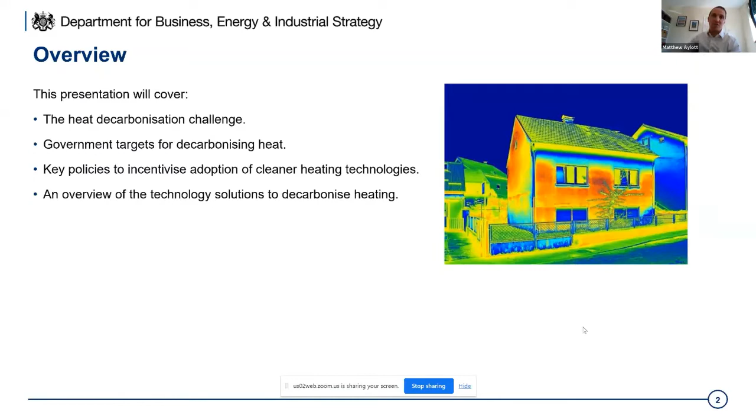In this presentation, I'm going to cover a little bit about the heat decarbonisation challenge as we see it. I'll talk you through some of the government's targets for decarbonising heat, the key policies we're adopting to incentivise cleaner heat technologies, and an overview of the technology solutions to decarbonise heating, including some of the novel and innovative technologies emerging on the market.

Most of this I'm sure will be very familiar to most of you on the call, but heating is responsible for nearly a third of our greenhouse gas emissions, and we've got a commitment to decarbonise the whole economy. Meeting our net zero targets will require virtually all heat in buildings to be decarbonised by 2050, but urgent action is needed now to keep us on track to meet that objective.

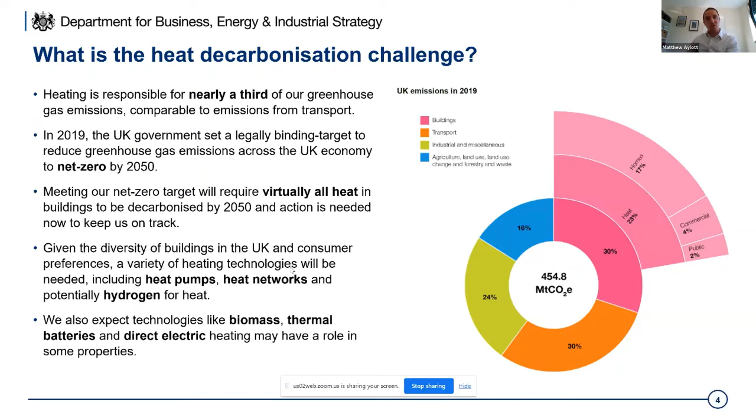Given the diversity of buildings in the UK and consumer preferences, we think a variety of different heating technologies will be needed. That will include heat pumps, heat networks, and potentially hydrogen for heating, but we also expect there to be a role for other technologies like biomass, thermal batteries, and even direct electric heating technologies in specific situations.

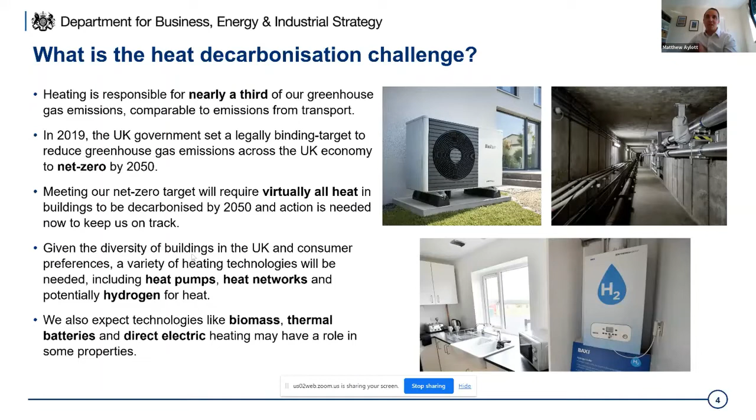Just to flag, these are some of the technologies which might be suitable. We've got a heat pump in the top left-hand corner, a heat network in the top right-hand corner, and a hydrogen boiler made by Baxi that we've been funding and supporting in the bottom. There's also alternative electric heating technologies like some of the ones we'll be talking about today, including storage heaters, thermal batteries, dry core storage boilers, infrared heating panels, and perhaps last but not least, biomass boilers in the bottom left-hand corner.

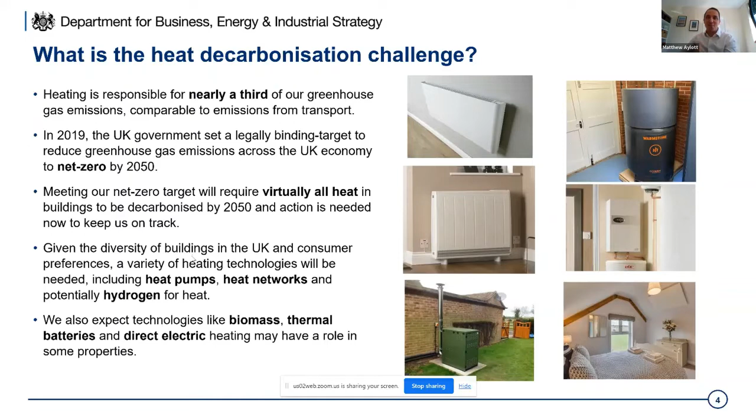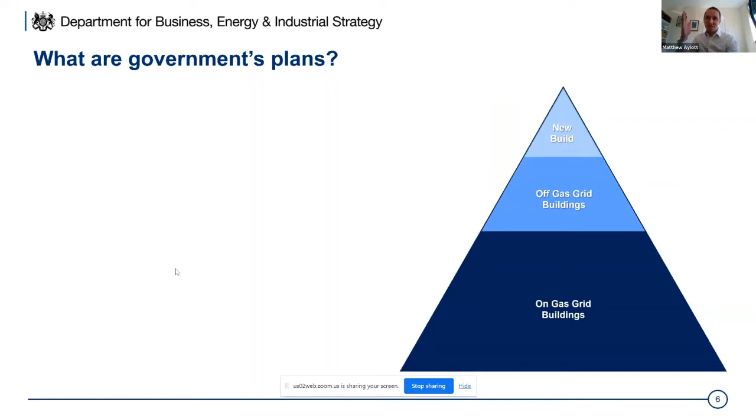So what are the government targets for decarbonising heat? This pyramid on the right-hand side shows you the kind of hierarchy of priorities. At the top of that pyramid is new build. Government expects to build 300,000 new homes each year from 2025.

We want to ensure that those homes are future-proofed, so we've introduced regulations that will improve the performance of new buildings. We've introduced the Future Home Standard, which will come into effect in 2025, but we also have an interim uplift, which gradually increases the pressure on housing developers to deploy more low carbon heating technologies and improve the thermal efficiency of the building stock.

So we think those new build homes are going to be particularly well suited to some of these low carbon heating technologies like heat pumps and alternative electric heating technologies.

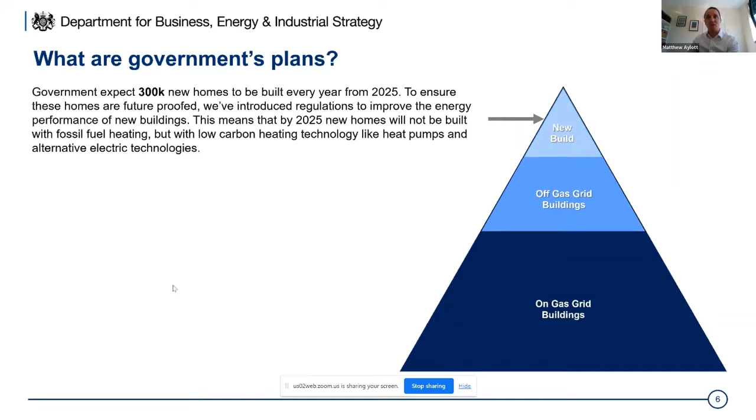There's also the 5 million homes and businesses off the gas grid which use oil, LPG or electric heating, predominantly direct electric panel heating. We're consulting on introducing new regulations that will end the installation of fossil fuel heating for large businesses off the gas grid from 2024, and for homes and small businesses off the gas grid from 2026. In practice this will mean that when a fossil fuel heating system comes to the end of its natural life, consumers will need to replace it with a low carbon heating system as an alternative.

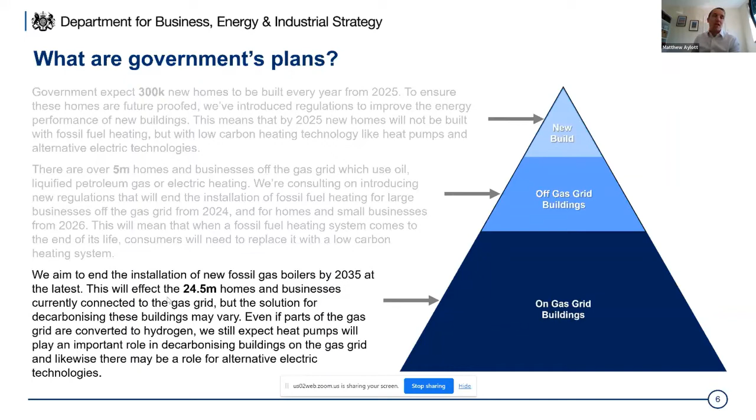And then finally, that big chunk at the bottom, the on-gas grid buildings - the 24.5 million homes and businesses currently connected to the gas grid. We aim to end the installation of new fossil fuel gas boilers by 2035 at the latest. Even if parts of the gas network are converted to hydrogen, we still expect there to be a significant role for heat pumps and potentially alternative electric heating technologies within that space.

So what are the key government policies that we've been implementing to drive forward this market? Ahead of regulations coming into effect, we're providing consumers with financial support to help them switch.

In October 2021, we launched our Heat and Buildings Strategy, where we announced new funding of £3.9 billion over the next 3 years to help decarbonise buildings and incentivise the adoption of low carbon heating.

That includes £450 million for the boiler upgrade scheme to provide grants for installing heat pumps and in some cases biomass; the home upgrade grant, which allows local authorities to support low-income households insulate their homes and upgrade their heating systems; and the Social Housing Decarbonisation Fund, which provides funding for registered providers of social housing to improve the energy performance of their social homes, including by installing low carbon heating.

And finally, £1.4 billion for the public sector decarbonisation scheme, which provides grants for public sector bodies to decarbonise their buildings.

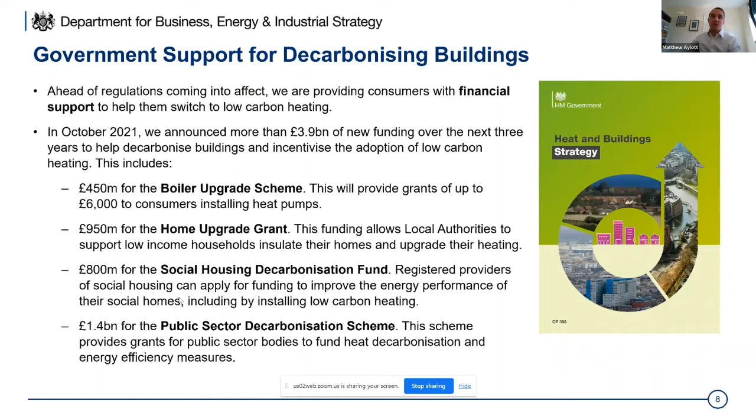But there are wider initiatives and incentives to decarbonise homes. We want to move away from the blunt instrument, which is grant funding models, towards something that is more sustainable in the long term. So, for example, these are three areas that we're focused on: committed to reducing upfront costs of technologies.

We've already committed to reducing the upfront cost of heat pumps in our Heat and Buildings Strategy by 25 to 50% by 2025. We're already taking steps to reduce costs of technologies by removing VAT on energy saving materials like heat pumps.

We're injecting millions of pounds of funding into electric heating research and development through things like our Energy Entrepreneurs Fund and our Heat Pump Ready programme. We're also developing the market for green finance products such as heat as a service.

As I said, we're investing a lot in improving fabric efficiency of our building stock. Some would argue we need to go a lot further, and I think that's a criticism of government, which is perhaps sometimes well-founded, that we could do more in that space.

We also need to do more on raising product standards, and we're taking forward a big programme of work through our eco-design framework to promote and support more efficient products coming to the market.

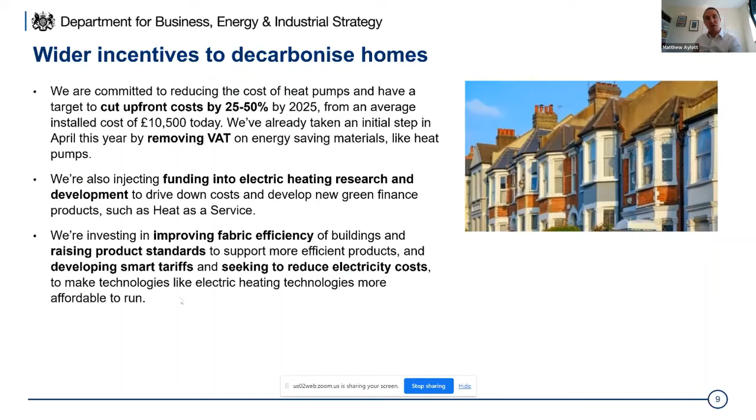So what are the technology solutions? We've touched on the three principal ones.

Hydrogen boilers - we're currently trialling and demonstrating the feasibility of hydrogen for heating ahead of strategic decisions on the future of the gas grid in 2026.

But we know that it will require repurposing of the gas grid, which is no small task. Hydrogen is a notoriously leaky gas, so we need to demonstrate and prove the safety case and upgrade the infrastructure as necessary. We also know that producing hydrogen, whether that's blue hydrogen or green hydrogen from renewable sources of electricity, could be quite costly to produce, and costs must fall rapidly for hydrogen to have a role in the decarbonisation of heat.

Heat pumps are one of the principal technologies that we think will be used in decarbonising our building stock. Extensive analysis indicates that heat pumps are widely deployable and cost effective, and that's why we've committed to installing a minimum of 600,000 heat pumps a year by 2028, meaning around 1 in 10 homes will have a heat pump installed by the end of the decade.

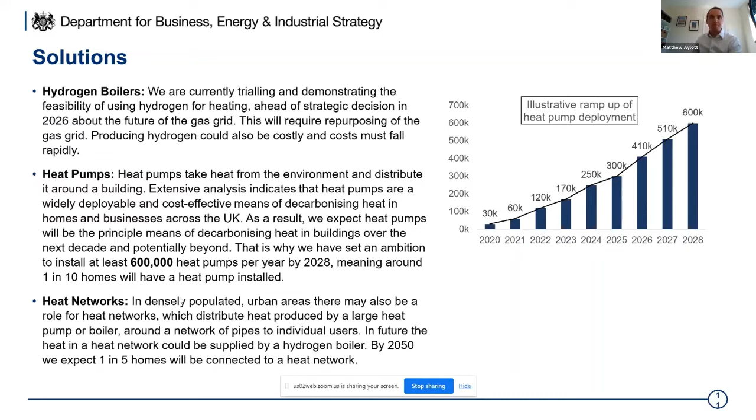There's also a role for heat networks, so of course, in densely populated urban areas, there's a need for looking at these kind of communal heating systems. In future, the heat in heat networks could also be supplied by hydrogen boilers, or it could be supplied by large heat pumps. By 2050, we expect 1 in 5 homes will be connected to some form of heat network. But what about alternative electric heating?

Alternative electric heating covers all manner of technologies, but principally we consider alternative electric heating to be thermal batteries, like dry core storage boilers, storage heaters, and infrared heating. And all of those technologies could play a really vital role in decarbonising heat.

We've commissioned research previously looking at alternative electric heating systems. We published the CODE report, the Cost Optimal Domestic Electrification report, which found that whilst air-to-water and air-to-air heat pumps were optimal in many scenarios, the cost differences, particularly in smaller properties, were very marginal, and alternatives could be a very viable solution in specific circumstances.

In addition, we know that not all properties will be suitable for a heat pump. Of the housing stock, we estimate about 70 to 80% might be suitable, but that still leaves a large chunk which will be unsuitable or less suitable, maybe because they don't have the space for an external unit or a ground array, or they may require expensive changes to heat emitters to make their home suitable for a low temperature heat pump system. And this is where alternative electric heating technologies could play a really important role.

Alternative electric heating technologies may also offer other benefits too, such as greater flexibility to be controlled to operate on demand with very fast response times. They may be easier to install and lower maintenance due to the fewer moving parts compared to a heat pump. So we think they have a significant role to play.

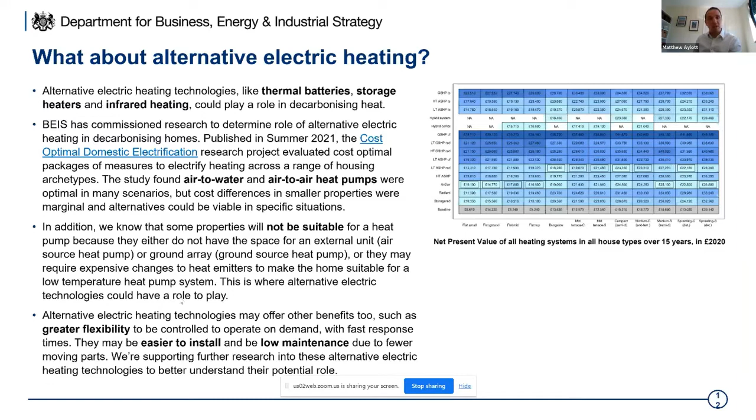We're supporting them with further research through things like our Energy Entrepreneurs Fund, and we're also supporting deployment of some of these alternative electric heating technologies through trials, through some of our policy interventions that we're developing.

So just a final summary. We need to decarbonise very rapidly over the next decades. I think that's a given. Improving energy efficiency, of course, underpins all of the actions we're taking to decarbonise buildings.

We intend to take some strategic decisions on the future of the gas grid in 2026, but irrespective of the role that hydrogen might play, electric heating will have a major role in decarbonising both off-gas grid and on-gas grid homes. Electric heating can be cost effective and it is widely suitable across the housing stock.

As I said, we're putting in policies to support a deployment of heat pumps, but we're also considering the potential of some of these alternative electric heating technologies, which colleagues will talk about shortly. What we need to do more and what we need to do better, particularly as government, working with industry, is to reduce costs to consumers, support growth in the supply chain to enable people to install these low carbon heating products and build consumer awareness in these alternative systems.

So I'll stop there and I'll hand back to colleagues.

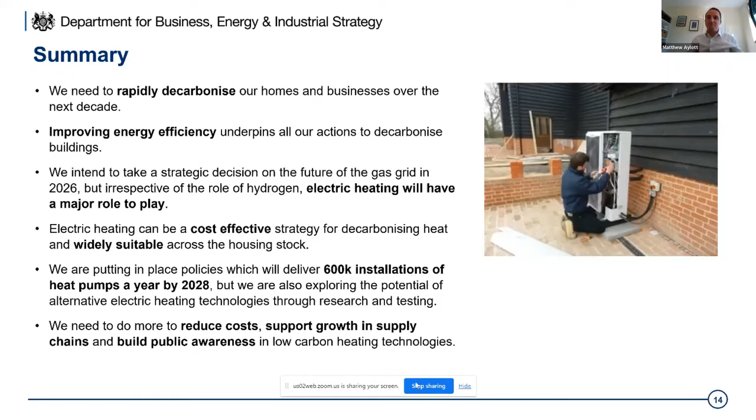Good afternoon, everyone, and thank you for having us here today. My name is Oussama. I am a member of the Heat Innovation team here at UK Power Networks.

We all have a role to play in the decarbonization of heat. And as you will see here today, thinking beyond heat pumps is actually vital to reach a low carbon future.

If you are familiar with our current ED2 plan, you would have clearly seen how far we have gone since this strategy came out, and how we are still pushing the boundaries of innovation on all fronts, especially the heating, which my team specializes on.

The first objective revolves around informing policies, where we have worked with people such as Dr. Matthew to ensure a successful future is reached in an optimal way.

The second objective would be our most valuable asset, which is the customers. How can we understand what they want, and then how can we streamline that journey? Last but not least is the network readiness, which clearly sits at the heart of it all, because that's how we will operate and we will allow this future.

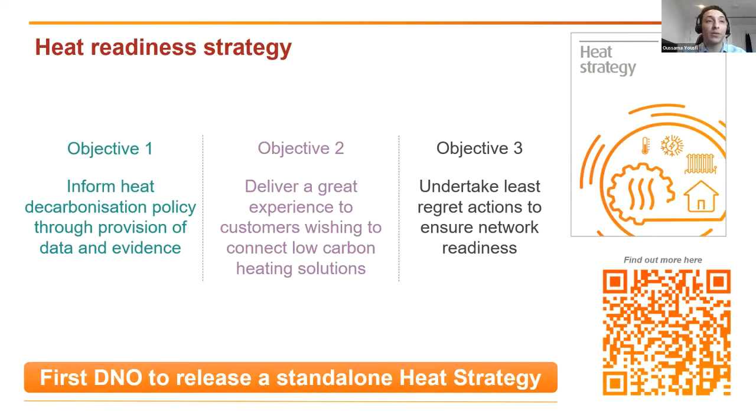As you can see, there are various sectors that Dr. Matthew actually touched on already, but although they may have some commonalities, each sector will have some different challenges that identifies them from others. And therefore, we need to have some specific solutions targeting each of them to ensure that we go forward on all fronts.

That is why we have a varied set of projects in our pipeline. Those aim to tackle not only the problems of today, but most importantly, future challenges. So varied projects to tackle various problems. I'm going to name a few here for time.

We have CommuniHeat, where we are looking to form a low carbon heating blueprint for off-gas grid communities. We also have Right to Heat, which aims to create a scalable template for social housing so that no one is left behind, which is very key and sits at the heart of our future plans.

Neighbourhood Green is investigating the clustering effect of having various low carbon technologies operating at the same time. This is important because when you think about how many low carbon technologies homes can have at once, you look at EVs, heat pumps, storage heating - various solutions. Each has a specific load profile and interacts with the network very differently. It's important for us to understand how that will look so we ensure we are ready in the future.

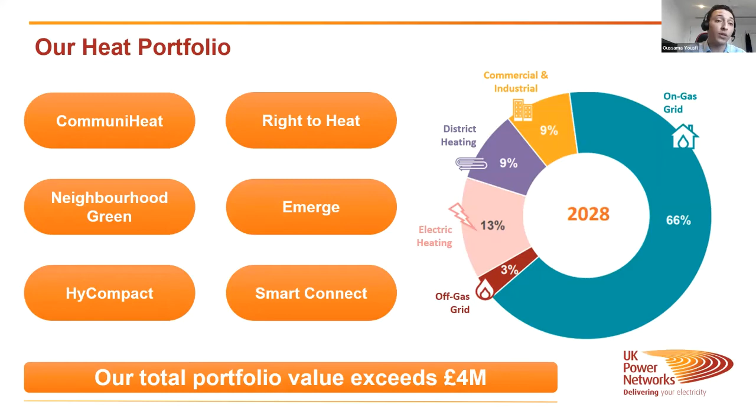At a very high level, our portfolio at the moment exceeds £4 million, which only focuses on heating projects. And we can't do it alone. Thanks to innovation, our network is more ready than ever to support the low carbon transition. Heat decarbonization will play a major role in this venture, and tomorrow's actions must be done today. The projects I mentioned, and many others we are already doing, we do not do alone. We collaborate with people such as yourselves to ensure we all go ahead together.

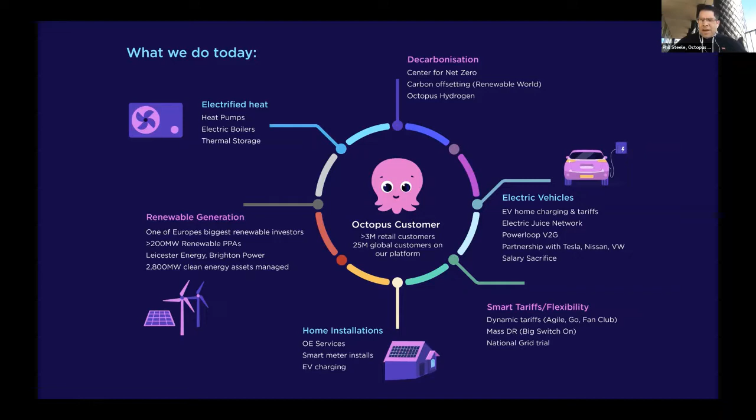What you'll find, and what you probably know us for, is actually we are really a technology company. We've put a tremendous amount of investment into the underlying IT platform that makes Octopus, which is called Kraken. The mission statement, the nearest we get, is: we use technology to drive the global green energy revolution cheaper and faster for citizens and the planet. I'm going to go through how some of that works.

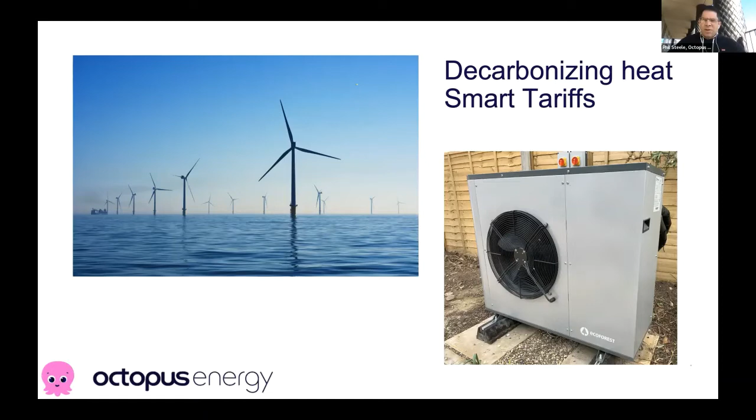If you're looking at smart tariffs, you've got to look at what generation is doing, and you've got to look at what the demand in the house is. Now, an air source heat pump is a fairly flat, continuous demand - it's very difficult to put a shape to it. Designing smart tariffs gets more complex if you've also got an electric vehicle, and if you've got solar on a roof as well, because now there's a lot more dynamicness going on with when you want to charge the car, when you need the car - you've got a more flexible choice of when to charge it, unlike the heat pump.

Solar is completely dependent on the weather. Beautiful sunny day here outside St Pancras, but other days, not so sunny, typical British weather. But if you've got battery storage, then you've got a bit more flexibility as to when that solar generated energy is being used.

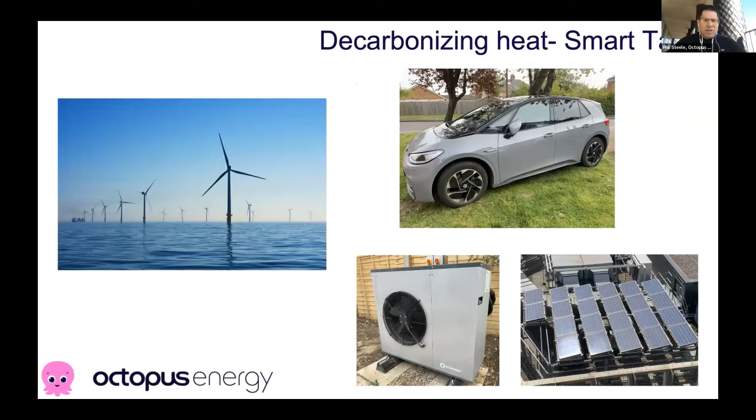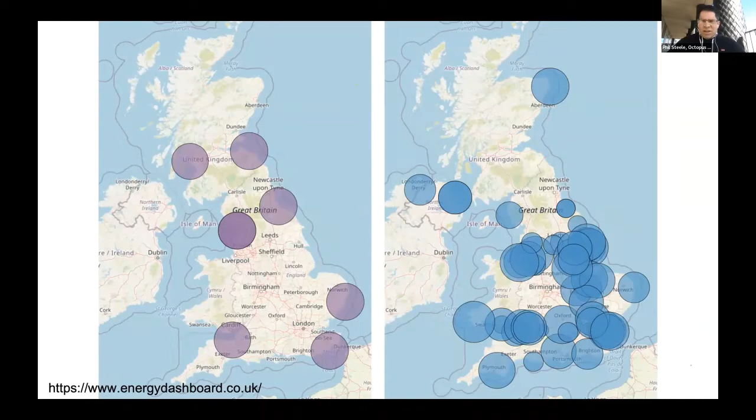So the big difference between these two sets of maps is it's highly distributed and actually very variable generation as well, as we move to an all renewable world. That's the other aspect we've got to manage alongside those things you've got in the home.

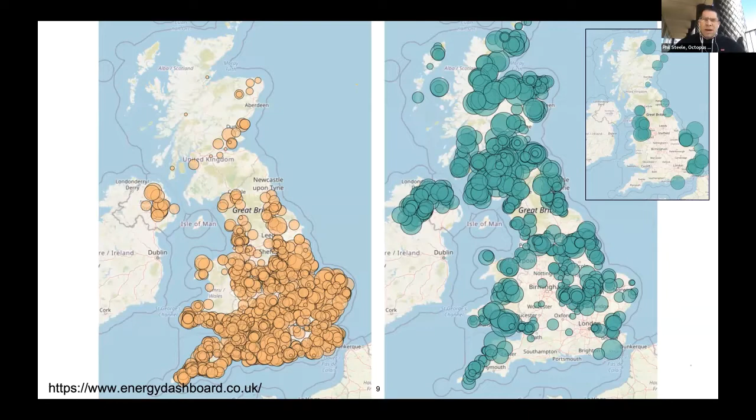I took a screenshot this morning of the statistics on the grid. This was at 10 a.m., as I was coming to London. You can see gas was producing 44% of our electricity, wind at 17%, solar at 14%. The other map is planned renewable generation in the next few years - a huge amount, and this is just where we see that kind of change to very intermittent, very variable, distributed generation that the grid has to cope with.

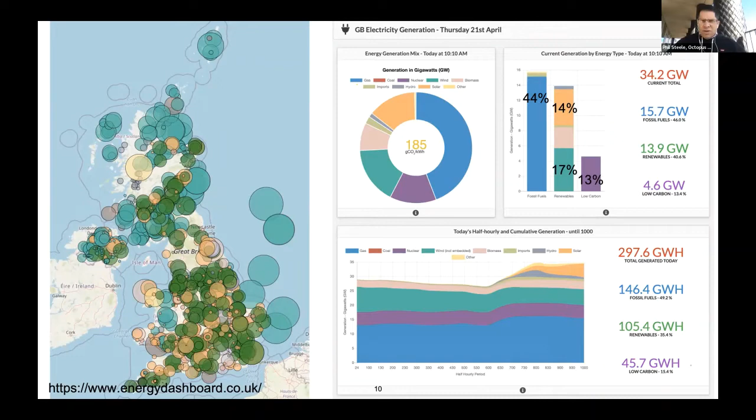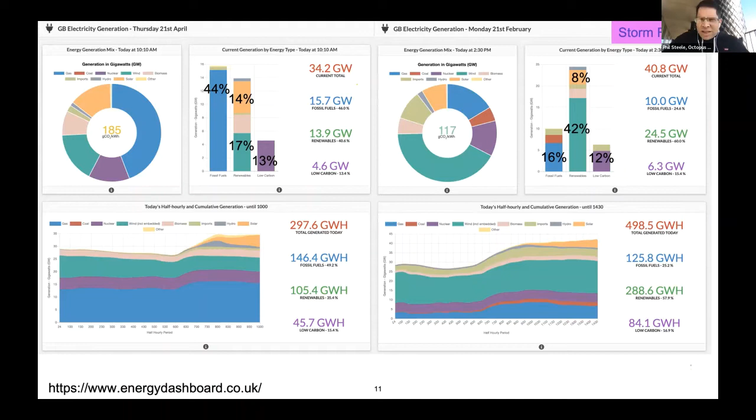Just out of interest, I looked back at some earlier data - my screen is in the pink at the top there. It says Storm Franklin back on the 21st of February, extremely strong winds. We lost a tree in our garden, and we saw wind generating at 42%, with fossil fuels right down in the mix of renewable generation. But that renewable generation has an impact on how the grid is being managed.

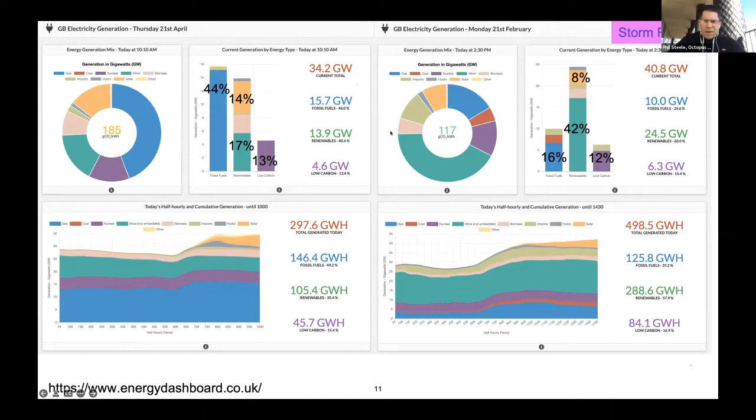Before I get to smart tariffs and things we're doing there, let's look at what we're doing with smart meters, because smart tariffs depend on the rollout of smart meters.

We're not shy of 20 million smart meters connected in the UK now. About half of properties are connected, 12 and a bit million there, claimed 99.3%. I hope Matthew's not going to kill me for this, but we still run into issues with smart meters connecting due to coverage issues and things. So although 0.7% sounds small, it's customers in that 0.7 that give us a headache when we're trying to get meters to work and deliver us half-hourly data.

If you want to know the difference between SMETS1 and SMETS2, ask me afterwards, so I won't go into that on this call for now. So what I've said is you've got intermittent and distributed renewable generation, the grid has got to cope with and transport that, and we've got electricity demand increasing, something like doubling by 2050 when we move to all electric cars and electric heating.

So we've been doing a lot of work over the past few years around smart tariffs - whether that's the Agile tariff, export for excess solar, or just charging a car battery or battery storage, the fan club tariff, our Go and its sibling set of tariffs called Go Faster, what we've done with Power Loop, which is the vehicle export tariff, the Tesla energy plan working directly with Tesla on optimizing battery storage systems, and more recently the Intelligent Octopus service as well.

Just a brief look at Agile, for those who haven't come across it before. Agile is priced per half hour according to the wholesale market for the day ahead. In fact, the time right now is 4:30, so we will have just published the Agile rates for tomorrow. Customers take advantage of this tariff to, in this example, charge a car at really low rates.

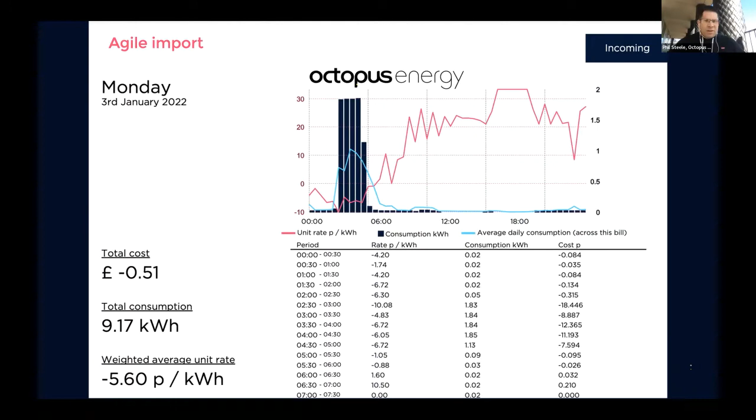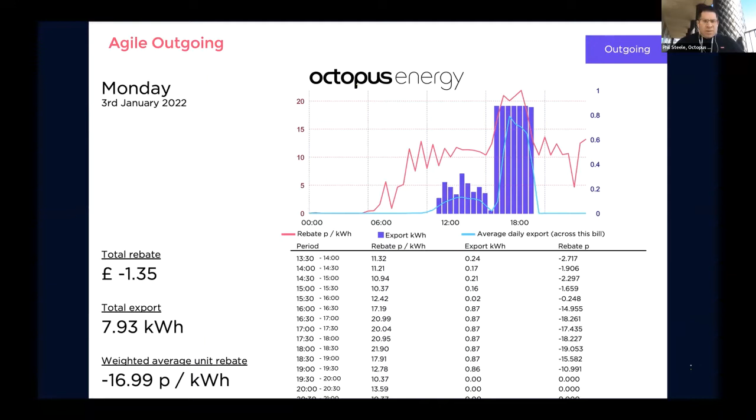The Go tariff was focused on EV drivers. You get a 4 or 5 hour time period overnight at 7.5p to charge a car, and then a flat rate through the rest of the day.

Going back to my discussion of renewable intermittency and the demand side of things, we're starting to get to the point where the whole system needs to be able to balance everything that's going on. Go Faster was one of our attempts at that.

The Tesla plan, similarly, is where Tesla take control of the battery using price signals from us, deciding when the home battery storage system is charging or discharging, as well as being topped up with solar energy. That means we actually have a matched price, about 11p import and 11p export, because we're using that battery to charge from the grid and then discharge back to the grid. It's a flat rate tariff, but we're deciding with Tesla when it's taking excess energy from the grid or putting energy back because the grid needs it.

More recently, the Intelligent Octopus tariff, initially focused on electric vehicles, probably expands to other services in the future. This takes it to another level, intelligently saying I'll charge the car that half hour and that half hour overnight, rather than just here's your full 4 or 5 hours of Go tariff, taking even more role in balancing the grid.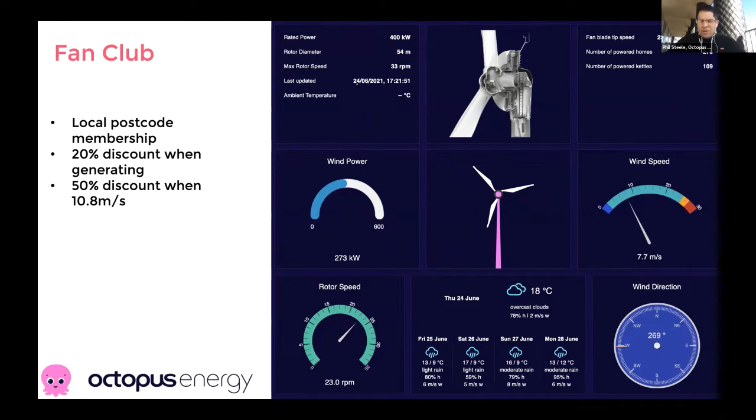So the fan club tariff again is looking at where energy is highly intermittent in generation from wind. How do we engage customers in behavior? Customers that are in a local postcode to 2 of our wind turbines get a 20% or 50% discount when that's turning, and they get access. This is the dashboard screen of everything they get to see about their local wind tariff. When you see what I've talked about with Tesla cars and battery storage systems, there is a huge number of products and technology connected to our smart tariffs, and some are going to talk about it later on today.

So summarizing all of this, tomorrow Octopus will bring the energy you need from your neighbor's solar panels, share the energy in your electric car with other homes on your street, and automatically heat water when prices are cheapest. Talking about heating water, I think I'm passing to James at Caldera. James, over to you.

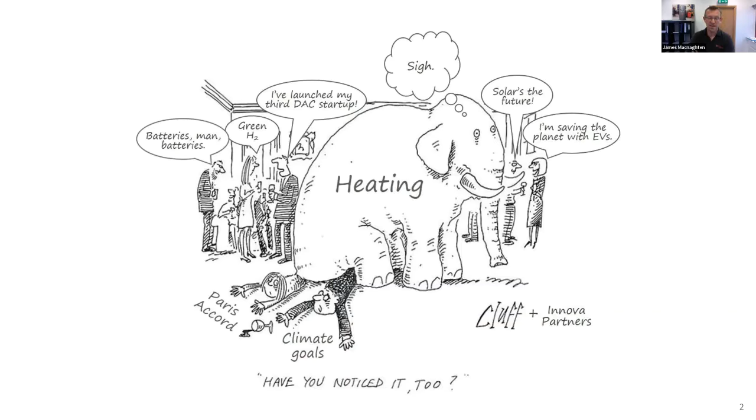It's sort of the elephant in the room. For years it's been pushed to one side because it's difficult. Some of the feedback on the information I'll give a bit later on is that a lot of our heating systems don't work and homes are complicated, so it's hard to decarbonize them. But first, I always like to point out there's an awful lot of heat storage in the country already.

Most homes - well, maybe about 40% of homes - have got hot water cylinders. If we're going to fit heat pumps, that number is going to go up significantly. So we've got about 70 gigawatt hours of thermal storage in our homes, and in total the UK has only got about 30 gigawatt hours of electric storage.

Another point that Phil touched on, which is very good, is that there's a huge amount of wind and solar coming, and generally people assume you want storage because of wind and solar. The idea is that when there's excess generation, rather than throwing it away, we can store it and use it. But in a grid where you have gas power stations or thermal power plants running, storage really doesn't have a role. We're really building our technology for the grid that's coming.

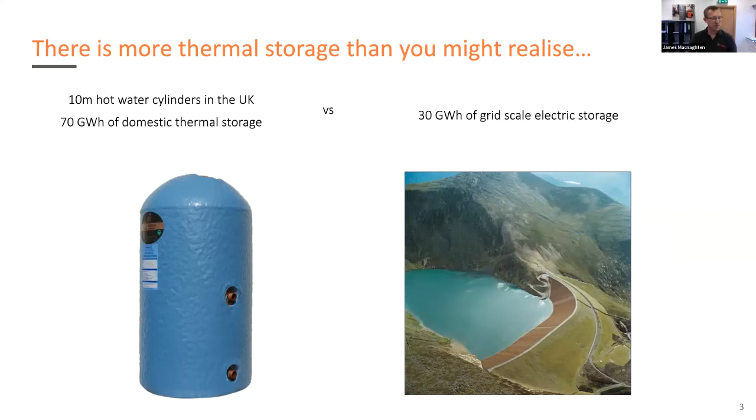I'm going to show a few slides on how much generation is coming, particularly how much variable generation. A lot of people assume storage is needed because we put wind and solar on the system, and I have lots of people say we should build more nuclear power plants because then energy is available. But the reality is that almost all of the storage in the world was built because of nuclear.

Nuclear can generate at almost no cost once you've built the power station. In the middle of the night, people don't use much electricity, so they wanted ways to absorb the demand, and they built storage by pumping water up a hill - that was pumped hydro. For pretty much every 4 gigawatts of nuclear power station, we built 1 gigawatt of storage. So I say to people, I don't mind if it's nuclear, wind or solar - all three of them will drive the demand for storage technologies.

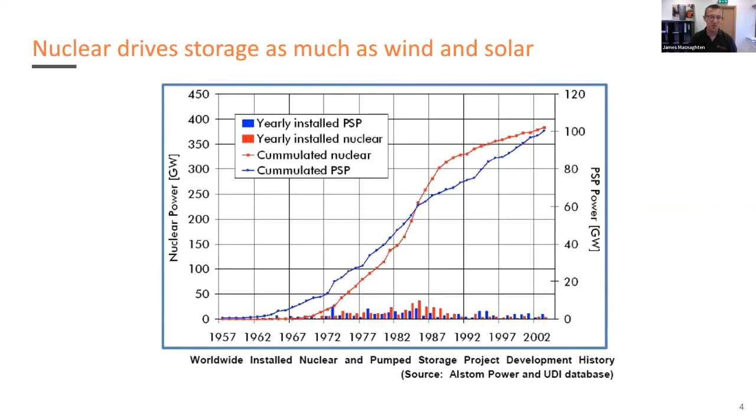When we do our modelling, at low levels of wind, solar and nuclear, pretty much the demand is always greater, and we've always got gas power stations turning up and down. The moment you get a surplus, suddenly the wholesale price drops to zero - Phil's slide earlier showed it happened in January this year. It's happened a few times during lockdown, but not very often.

This is when storage becomes valuable - we're a source of flexible demand. Electric vehicles can provide this, heating can provide this, maybe heat pumps can provide this. But there's a limited number of things big enough to absorb the amount of energy that we need to.

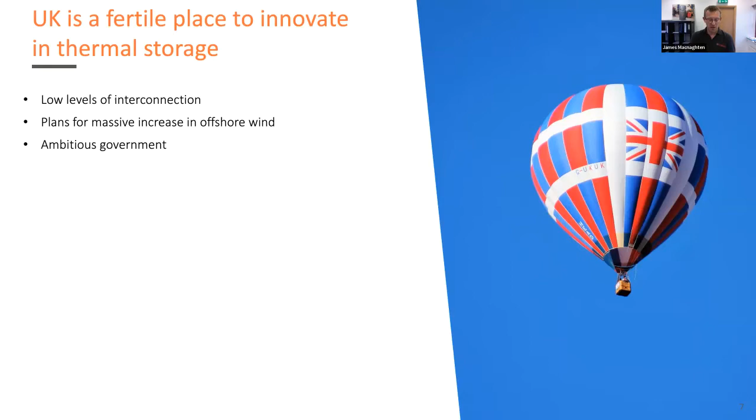And the UK is a great place to do it. We've got very low levels of interconnection with our neighbouring countries. We've got massive plans for offshore wind. We are pretty much the world leader, and I expect to stay broadly the world leader, certainly in size of the amount of installed offshore wind relative to our grid.

And we've got a very ambitious government that's looking to decarbonise our economy. Now, going on to talk about this, this is Warmstone. For those that haven't seen it before, it's got a solid core inside the steel outer cylinder.

We heat it up to high temperatures, it stays solid. We put it inside, the steel vessel is actually a vacuum vessel, so we keep all the heat inside there, and it can sit outside your home, it can sit in a garage. This stores 100 kilowatt hours, and it can output power at 30 kilowatts, which is the same as a boiler, and it can output at high temperatures.

And we've designed this as our first product, and we've designed it for homes that are off the gas grid. They're generally older, larger, and less well insulated, and they're often difficult for heat pumps to tackle because you can't put heat pumps in that are necessarily big enough.

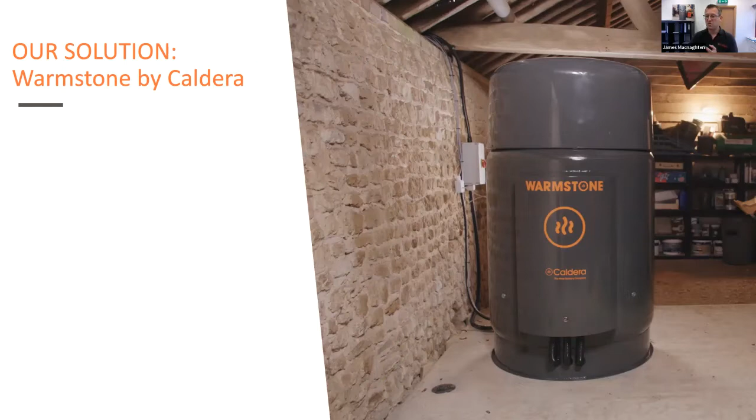In terms of the market, there's particular interest from people that also want to put solar with this. So in the summer, you can store all of your excess solar and have free hot water all summer.

Now, the 3 breakthroughs that made it work: the core material we've developed, and the core inside that unit weighs 1.3 tons, and the whole unit weighs 1.8 tons.

The vacuum insulation does a great job. It's hardly warmer than ambient when you put your hand on the outside.

And then lastly, because it's very hot, we needed a safe way to get the heat out and into your home. So from a plumber or an installer's point of view, it behaves very much like a boiler, or in fact, it does behave like a boiler. It has a flow and return, you set a temperature and you let it do its thing.

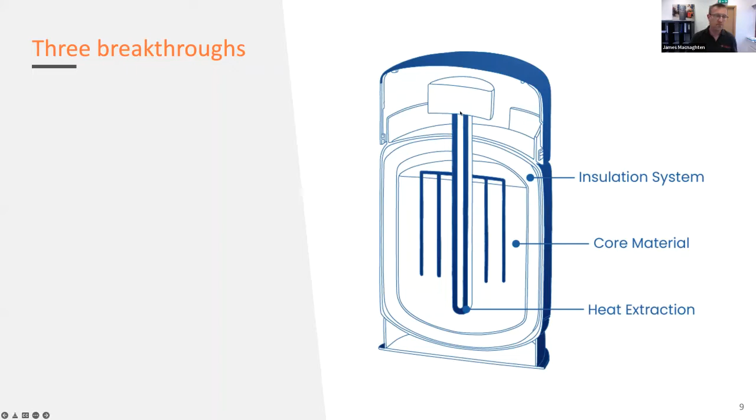It's been really good. I would say the first thing we've discovered is that most homes' heating systems don't work, particularly in older properties. That has definitely been more complicated.

Real trouble getting installers in different parts of the country. And, you know, I've said it before, but if we're going to do heat pumps, if we're going to do this sort of decarbonised heating, we need a massive training program to bring in more skilled people into the industry. There are just not enough people around at the moment.

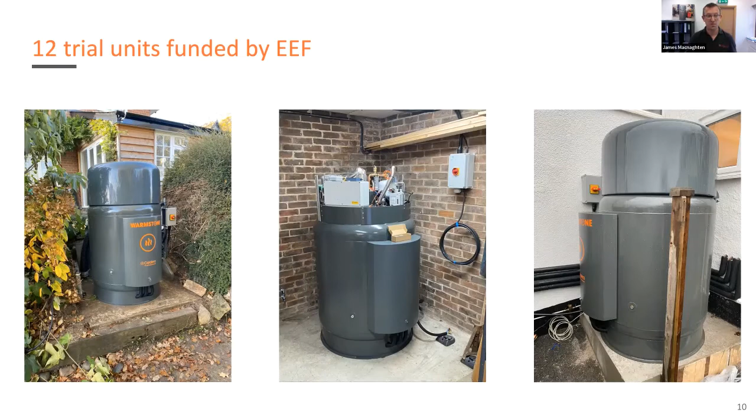And I would say one of the other things that we discovered from the whole process is it very much depends on the homeowner, who can have as much of an influence as the house as to how much energy they use. I'm going to show a few bits of data, but I'll talk more.

This is just a unit. As I said, it's a heavy unit, so we crane it into place or we move it on trolleys and we deliver it on the back of a lorry.

Once it's in place, we need to connect it up to your main incoming electricity supply. It will pull very high current, so this unit can charge at 90 amps, which is pretty much the maximum that you can put on a single phase.

And it will fully charge in 5 hours, which means that on an Octopus Go tariff, on 4 hours, you'd only be able to put 80 kilowatt hours into the unit.

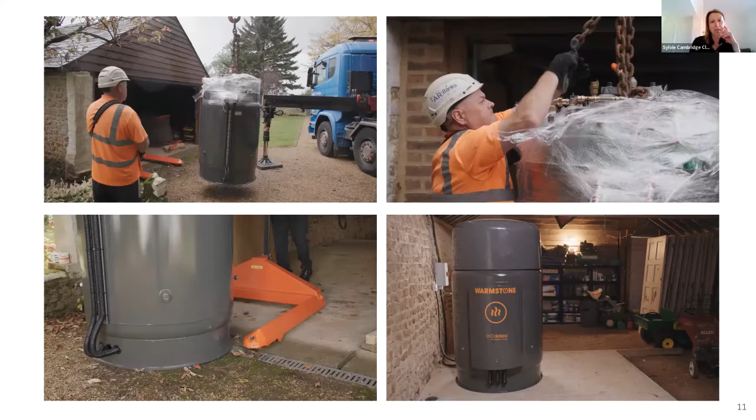1 minute, James. Sorry? Oh, 1 minute. Okay, I'm gonna run through.

This was just one of the graphs. We could compare all the homes we did. We kept the oil boiler so we could switch across and compare performance. This was an old oil boiler. It's actually a 40 kilowatt boiler, 68% efficient, won't deliver more than 26 kilowatts.

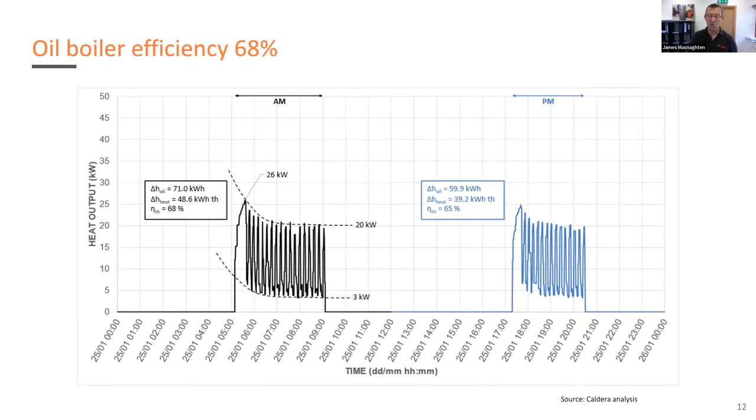And this is the same home running with a Warmstone. It peaks a little over 40 kilowatts on startup when it heats all the water up, generating 87, 88% efficiency. Length of piping runs into and out of the house can have an impact.

But broadly, we're still expecting units to be around 90% efficient over the year.

Just to follow up on what's coming next: in terms of homes, of the 12, about 6 can use 100 kilowatt hours in a day. The other ones need more energy. I think the largest user was using 300 kilowatt hours a day, so that gives you a feel. When you go to bigger homes, the heat usage can be very significant.

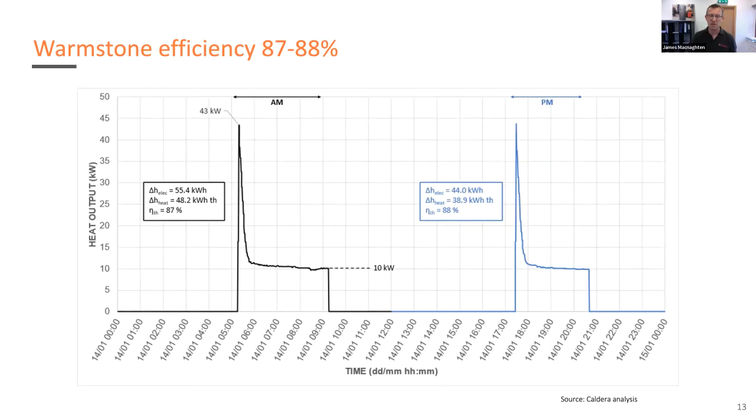In terms of where we are at the moment, we've got a long way to go. We're basically running a waiting list for anyone who wants one for their home, so I'm afraid I can't give anyone one soon.

We're also looking at developing an industrial unit for steam generation, which will be in a 20-foot container, and it'll be about 1,400 kilowatt hours. So thank you very much for listening. I'm very happy to answer more questions at the Q&A session and give any more details.

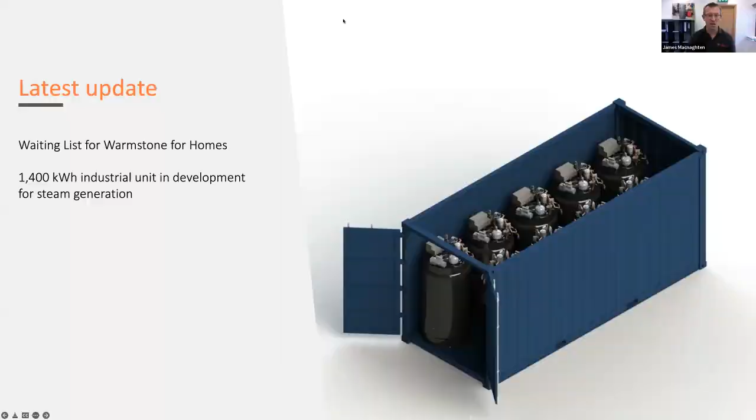I think now I hand over to Johan from Tepeo, who is one of the founding members of Thermal Storage UK, which is our new trade association.

Just stop sharing, how do I stop? Have I stopped? Yes, all good. Johan, you're on mute. Right, thank you, one second. I don't know if Auriane is able to share my slides for me. Yeah, just give me a minute. Thank you.

So I can start. My name is Johan, I'm the founder and CEO of Tepeo. I spoke at this event last year as well, so some of you may remember me. It's quite a complementary product to Caldera in many ways, although we are looking at smaller homes. Auriane, if you could go to the next slide, please.

I'm going to skip the broader context setting around heat, because I think that's been done already very helpfully, and focus instead just primarily on our product. So what we've developed at Tepeo, we're calling a ZEB, or zero emission boiler. This is a plug and play replacement for a fossil fuel boiler, oil or gas boiler.

Typically they take about a day to install. Technically you'd call this a dry core thermal storage boiler. It's designed for use in wet central heating systems, and there are no changes required to a heating system to do this. It works with all sorts of heat emitter types, including things like microbore, which are particularly difficult for heat pumps to tackle. The unit is about the size of a washing machine, although it is a bit taller.

It weighs about 375 kilograms. It basically stores energy in a solid thermal core, much like the Caldera units, and charges at a rate of 9 kilowatts, storing about 40 kilowatt hours of thermal energy. It then discharges that heat into any water circuit, into your central heating or water circuit, at anything between 35 and 80 degrees Celsius as set by the user, at up to 15 kilowatts.

Every ZEB is then connected to our back-end IoT infrastructure. We've got a really strong emphasis on IoT and machine learning, and we're using machine learning to optimize the charging of each device based on carbon, costs, and user preferences. Every device is able to then self-consume solar, renewables such as solar PV, and they have high accuracy metering and ultra-fast frequency response built into them.

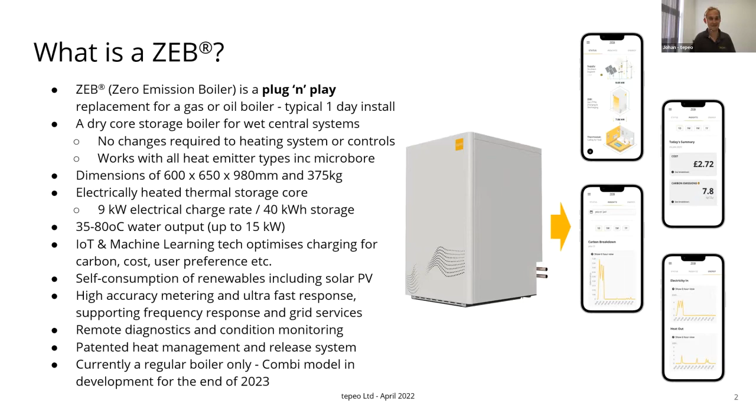As I said before, each ZEB is then connected to our IoT platform, and we receive well over 100 data points, different types of data at least 1 second resolution. Some are much finer resolution for things like frequency and power monitoring.

And then we're using machine learning to build a really accurate forecast of the heat demand in each house, using all the historical data, as well as things like local weather forecast, and particular user trends and the way people use their heating in their particular home. And that's really supported by all of the data points and all the data that we have streaming from the ZEB.

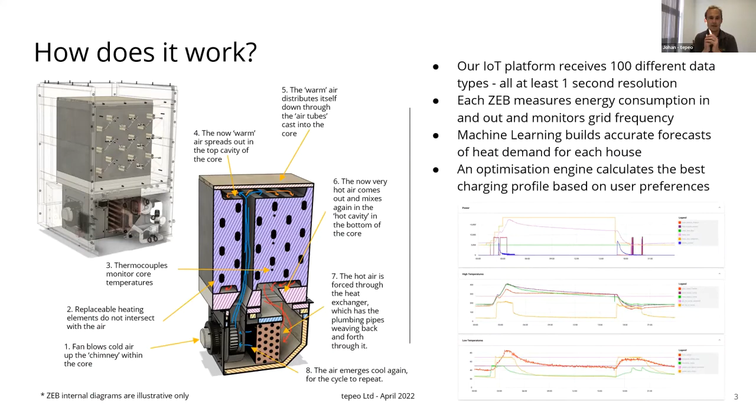So what I wanted to focus on particularly today was just to give a little bit of an answer to an often asked question about how we compete with a heat pump when effectively we're using direct electric heating. And the analogy I like to make here is, a heat pump has a COP, or coefficient of performance, and a ZEB has flexibility. So really we're pitting those two against each other.

Heat pumps are a brilliant technology, as others have said, we should be installing as many of them as we can. But we find that in many cases, people are not able to install them. I think Matthew said that even BEIS thinks maybe 75% of homes. Anecdotally, we see from heat pump installers that sort of 50% of surveys might not end in a heat pump installation. And the question is, what are we going to do with all these homes? At the moment, it is kind of being swept under the rug and not really dealt with.

But back to ZEB flexibility. So as I said, flexibility pitted against coefficient of performance, and ZEBs have enormous amounts of flexibility on them. 40 kilowatt hours is about 3 and a bit Tesla Powerwalls in terms of chemical battery storage. There are EV tariffs out there, such as one provided by Octopus, which today has a ratio of 4:1 between off-peak and peak pricing. So you can at a high level see how we can compete with a heat pump, which more or less has a bit of flexibility, but generally will be run on a flat rate tariff.

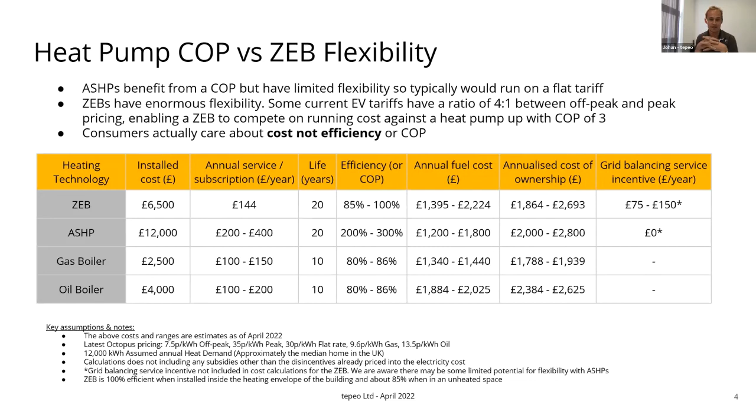So it's a little bit lower than the median home, assuming some inefficiency on the average gas boiler. But actually for smaller homes, the point we're making here is that the annualized cost of ownership, this is without air source heat pump subsidy through the BUS scheme, is actually very comparable with a ZEB. Particularly in smaller homes, we know that people have a lot of issues with finding outside space or inside space, or needing to change the fabric of their home. And that's where a lot of the demand is that we're seeing for ZEBs. I've included a lot of the assumptions that I've used down there because, as I'm sure all of you would appreciate, there are lots of factors at play here, and tariffs is a big one in particular. So I've stated everything that I've done back down there.

And last slide, I'm just going to keep it brief. I think it's been brief. So last slide is really just to say your customers love the product. We've started selling ZEBs in December last year.

So the zero emission boiler is now available in limited volumes throughout large parts of southern England. But I should stress, limited volumes.

We are growing our installation network to cover the rest of the UK over the next 12 months. Oussama wanted me to mention we are shortly to be working with UKPN as well, on a project within their regions to install about 30 units. We are in the process of scaling up production capacity. We are heavily production constrained given the amount of interest we've seen.

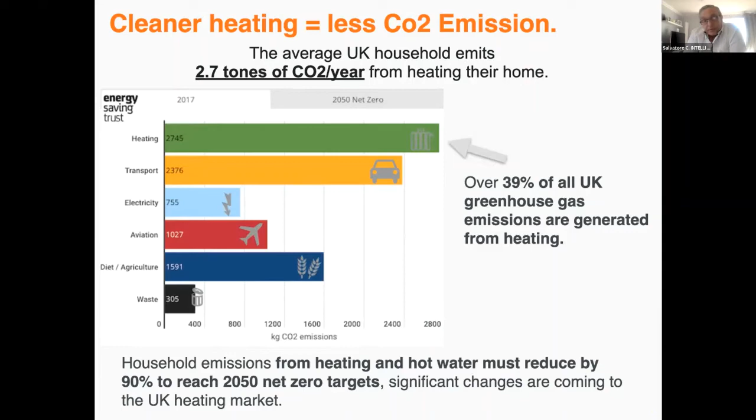Cleaner heating, of course, means less CO2 emissions. As we already stated, 39% of greenhouse CO2 emissions come from heating. We understood that years and years ago, and what we did as a manufacturer...

Low carbon heating is the recommendation from the government to replace gas and oil systems. 70% of our housing stock in the UK are properties built before '86. Now, heat pumps are a perfect solution.

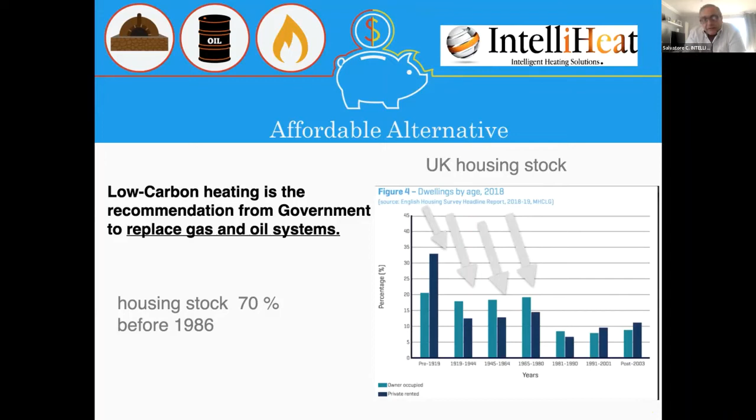I don't think there is a perfect form of heating. It all depends on the fabric of the building, and over the last years we have learned that every property, you can specify a different heating for every property. So there is not one form of heating, there are loads.

But those are the suggested steps we took as a manufacturer, just some simple manufacturer, over the last 21 years. Number one, we enforce eco-design Lot 20. Number two, we applied and are in contact with BRE for recognizing new technology in the new SAP 2012. Number three, intelligent heating control. Number four, accurate heating zoning, this is crucial. Number five, heat on renewable. And number six is life cycle thinking.

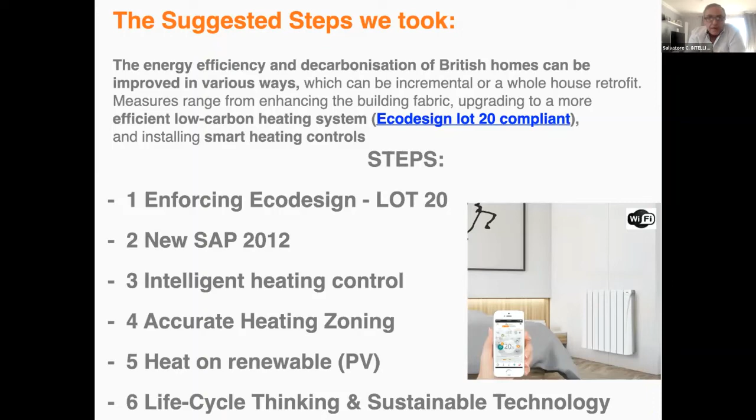So it's sustainable technology to build those radiators. Number one, enforcing eco-design Lot 20. This is a legislation that came into force in 2018. Basically, all over the world, especially Europe, they decided it was completely silly to have an analog thermostat or no idea about the room temperature.

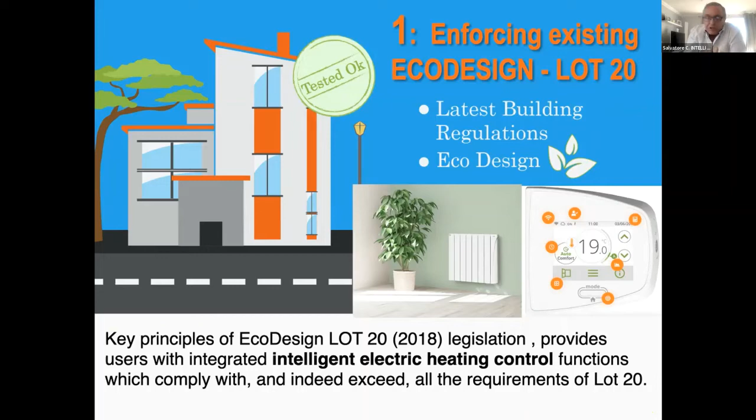When we first started 20 years ago, people were asking, what sort of temperature have you got in the room? And no one was able to identify the comfort temperature, the background temperature. So we decided to integrate all those features inside our products. So all our products comply, of course, with eco-design.

Lot 20 is the most important part of the eco-design legislation. One, you need to have a high-accuracy temperature control within 0.1 or 0.2 degree, depending on the radiator. Adaptive temperature control and eco-start functionality. Programming from 8:41 to 9:22 by the minute, 21.5 degrees. Bearing in mind that 1 degree, if you set your comfort temperature to 21 instead of 20, is a waste of £70 a year per radiator per room.

Smart open window technology, presence detection, real-time energy consumption for each radiator. Self-programming, that's a nice one. Basically you put your program in, you run away, go to work or on holiday, whatever, and the radiator and app will automatically learn your lifestyle and adjust the program accordingly.

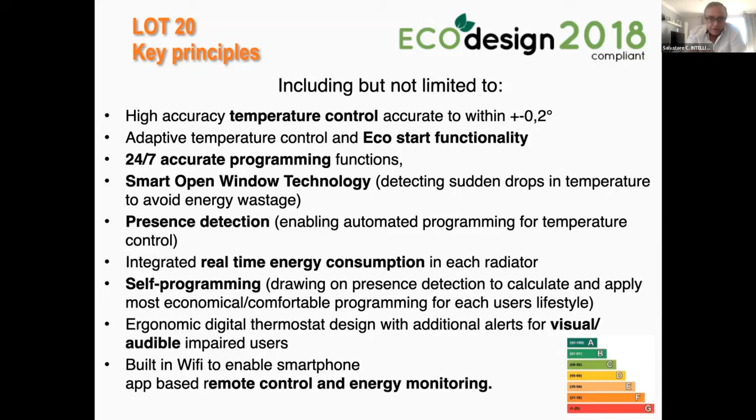Roughly the economy our clients made is 35-40% in comparison to storage heaters. Built-in Wi-Fi, again, is not a gadget. Being able to control your system remotely is an energy-saving feature.

Cost-wise, heat pumps are great, between £9,000 and £13,000, up to £24,000 if you've got the money. But I think the bigger challenge for local authorities and communities is not the new build. New build, I think we're okay with, it's not a big deal. I think it's trying to retrofit the millions of properties that have got storage heaters, oil or LPG. So what our British clients did in a property was replace all the LED lights.

Now, the big chunk in a property - and we see, as a manufacturer, we work with installers, so we're in touch with clients, we talk to them every single day - we've noticed that normally they call us to replace those storage heaters. And the storage heaters, they are 20 kilowatt in a property approximately. That's a big, big chunk. 20 kilowatt is a lot.

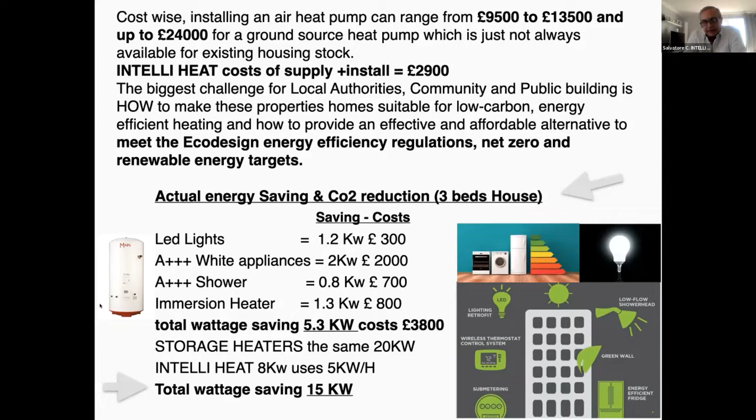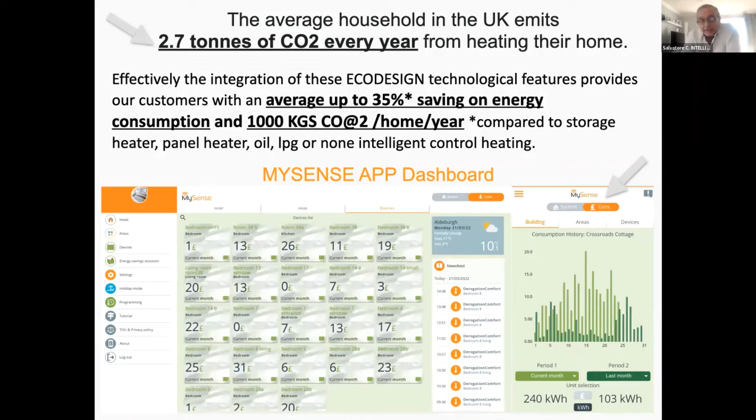It's going to connect automatically with Google, and connect automatically the system with degree days. So it knows that your postcode is IP270 Alpha November, it knows the amount of degree that you need, and it's going to suggest a program for each radiator, not for the entire house. So if you've got 100 radiators in a property, every radiator's got a different program, a different building, and you can individually control each radiator.

The second is the SAP methodology 2012. We have a look at it, and the appendix Q on the database mentions only one brand of electric radiators - I don't want to mention it because you know the brand. They've got the monopoly in UK. And I think it's a bit sad that we cannot offer the customer, the British public, the choice. You've got 1,000 boilers, 1,000 solar panels, 300,000 heat pumps, but only one electric radiator.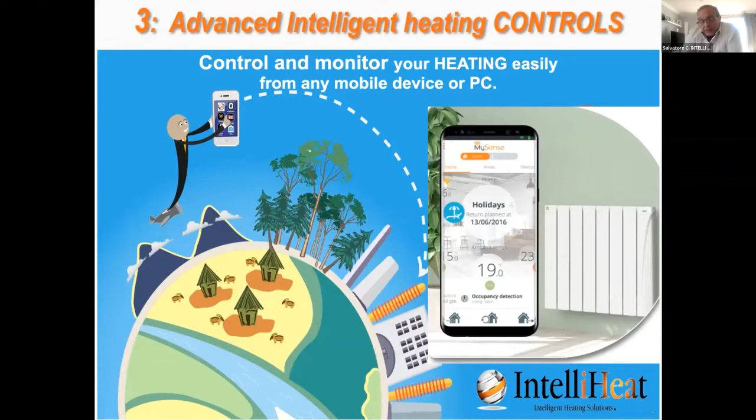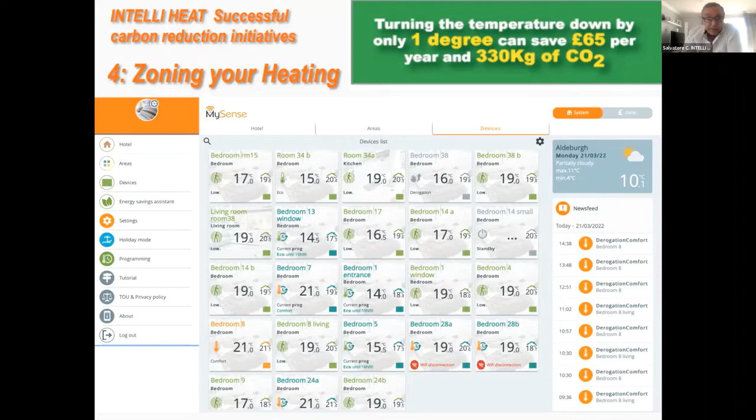1 minute - SAP 2012, advanced intelligent heat control. Yes, we think the future is there: having all this feature and control, open window detection, presence detection, eco design control, automatic programming. It's the most important part. It doesn't matter which system you use, you need to zone your heating. Each room needs a different temperature, as each human being - someone wants 21.2, someone wants 15.5.

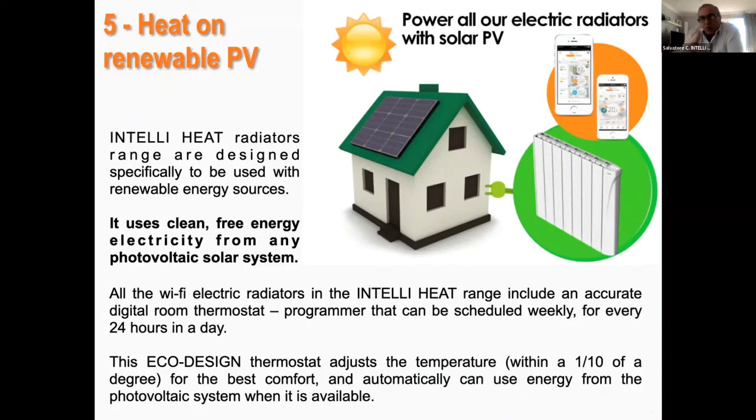Number 5, heat on renewable PV - all our radiators, of course, have been designed to work with photovoltaic. And our last creation, creative radiators, are our eco-friendly radiators. They are built with recycled marble - we collected 5 tons of dust marble and created creative radiators. So in real terms, they are forged from 100% recycled marble and produced using eco-friendly cold technology. They are radiant heat, and they can be used in any form, any shape. They are all connected through the app on the cloud.

So there are viable alternatives to fossil fuels. There are different options out there. It all depends on the property, really. You know, if you live in a 2-bedroom flat in London, I don't think you can fit a heat pump, but there is a low carbon electric heating solution that can be used.

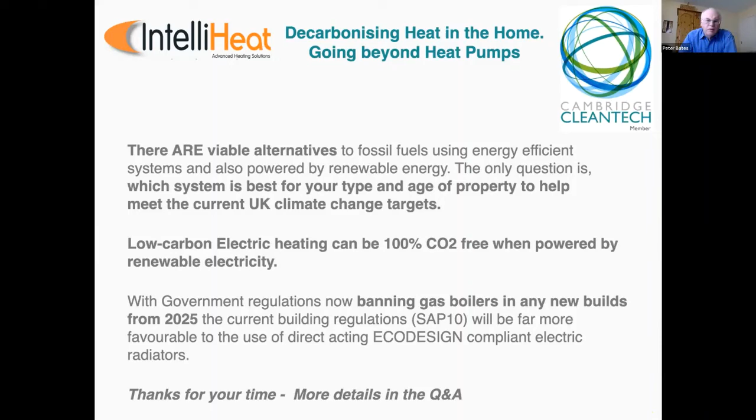That was great, and can I thank all the speakers for their presentations today. We're going to go on to question and answers in a few moments, but I think hopefully this event so far today has actually kind of highlighted that there are alternative solutions to heat pumps. It looks as if government is beginning to think of alternative solutions, and maybe there will be some grants available, particularly in the future.

I'm not quite sure, but hopefully that will happen. And I think the key aspect of all this is flexibility in terms of electricity tariffs to make that possible.